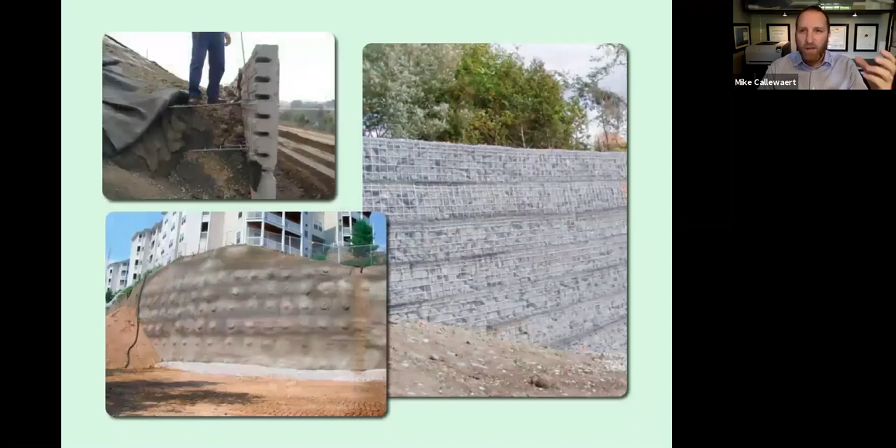So I want to talk a little bit right up front about mechanically stabilized earth, or MSE wall. You'll hear that phrase MSE wall, and it covers a lot of ground, really. It can be anything from straw and adobe blocks all the way up to engineered systems like you'll see today. So pretty typically when folks think of MSE, they'll think of things like a wire mesh or shotcrete or concrete facing, even things like wood crib walls or segmental block walls, that sort of thing. Even poured in place can be classified as MSE.

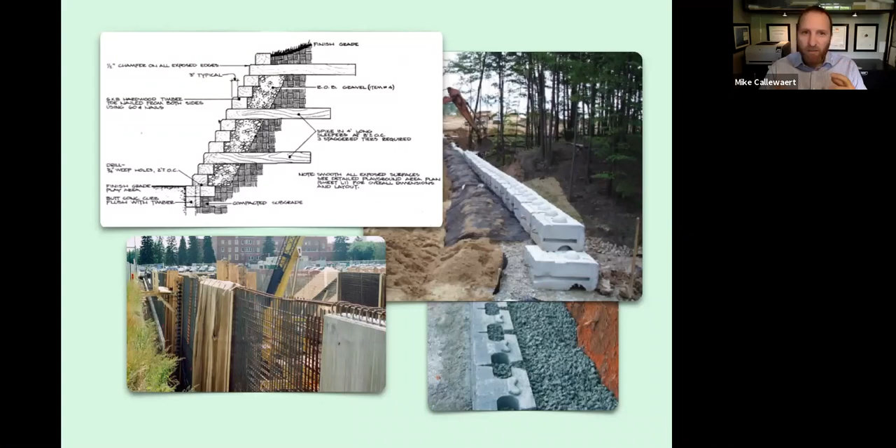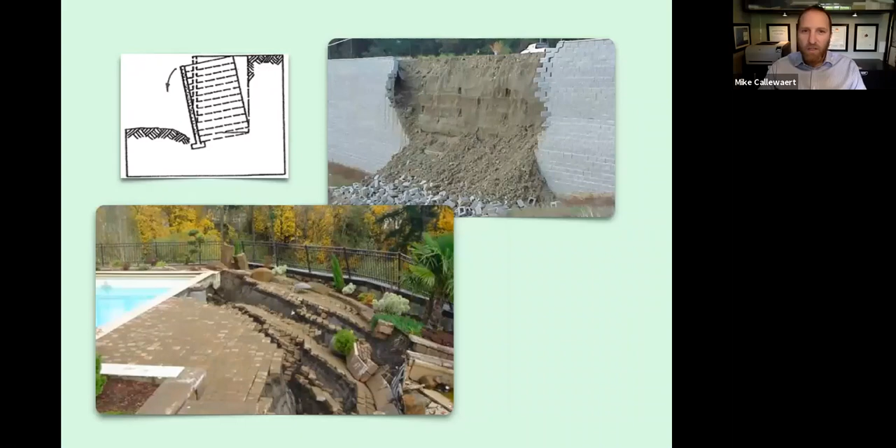With these types of walls, some of the challenges that we see are where you might have differential settlement, overturning, you might see hydrostatic pressure or soil movement from behind the face. It can cause some pretty catastrophic failures. It can also just cause some disruptions where you get a little bit of settlement and all of a sudden the system is no longer stable.

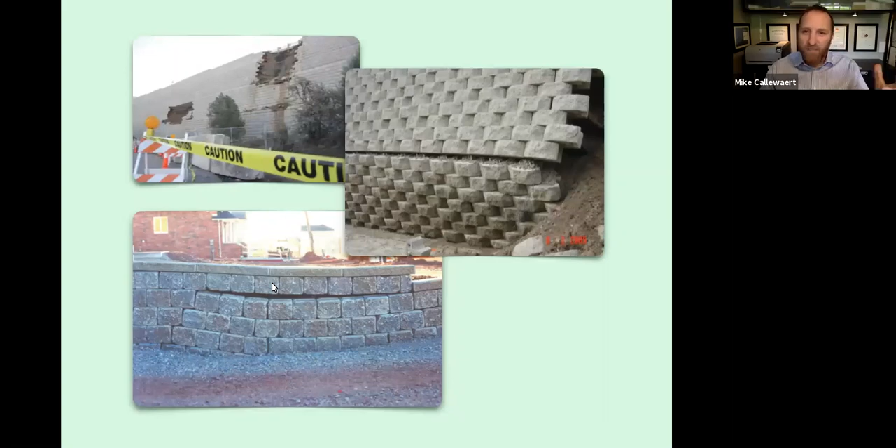Now you might be looking at this thinking, what's the big deal? It's a sandbag and a clip. It's actually closer to concrete than it is to a sandbag. So I want to talk a little bit about how it's similar to concrete, and then we'll talk about how we're unique to all other systems in the market.

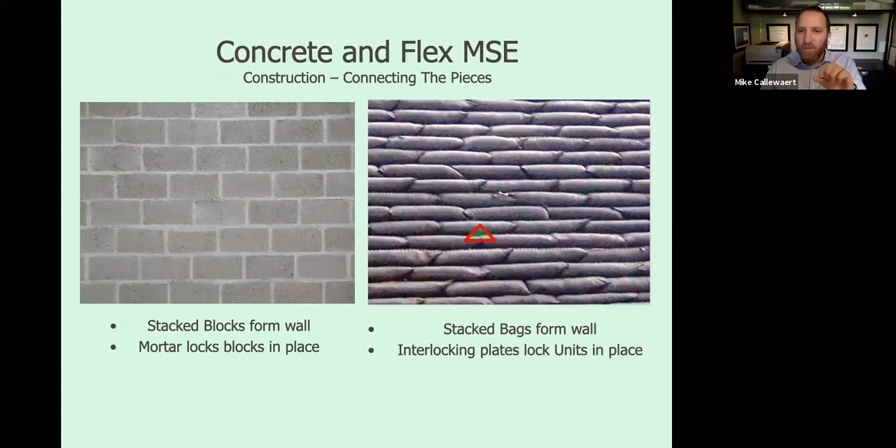So like concrete, you stack in an offsetting pattern, so you create a running bond up your wall. The interlocking plate bridges the joint between two bags, so that when your subsequent row comes in, it centers over the plate, locks it into place, creating a mechanical connection. So you have hundreds or thousands of these throughout a wall. So there's no single point of failure, but they connect it together much in the same way that mortar or pinning might with other systems.

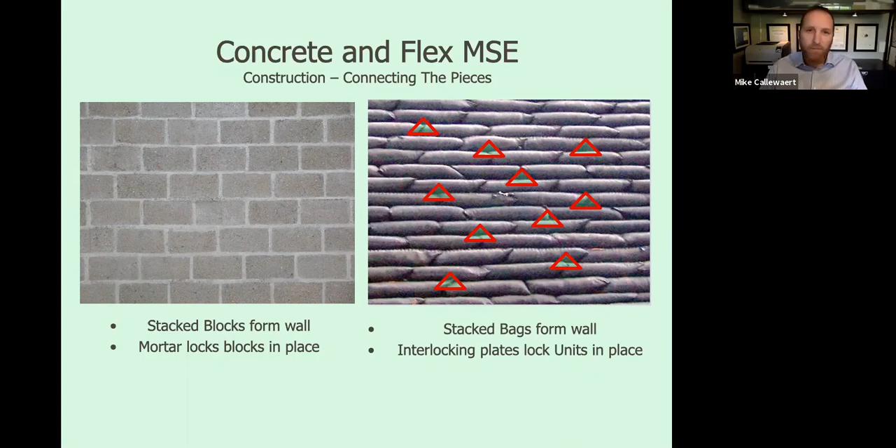If you want to make a Flex MSE wall green, you vegetate it. And so there's a number of ways to vegetate the system: grasses, flowers, trees. We get into that as we go. If you want to make a concrete wall green, you paint it. Then you come back in 2 weeks and you paint it again.

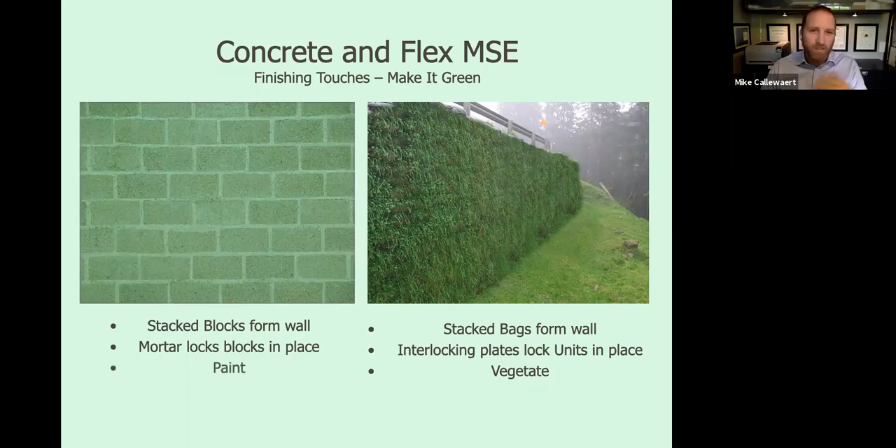For your folks that are designing and building in public space, maybe graffiti is an issue. Maybe that's a line item in your budget that you'd like to get rid of, so you can get that piece of equipment or that new hire. With Flex MSE, if they want to graffiti our system, we'll just hedge clip it off and call it a day. So that's really where the similarities end between the two.

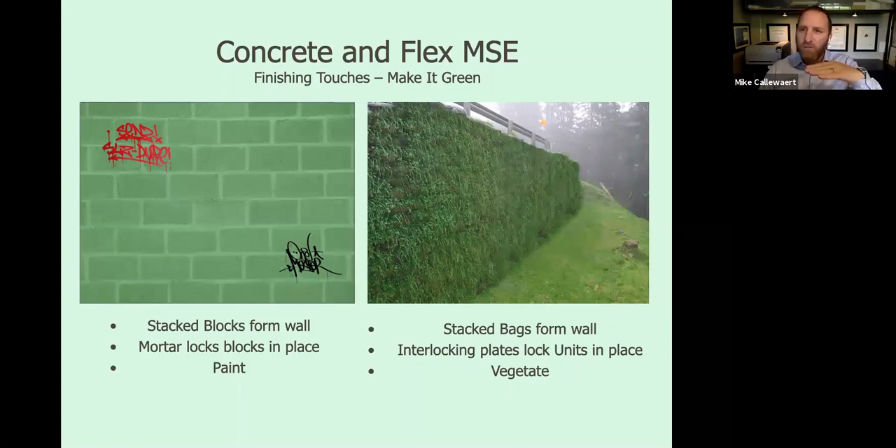So let's talk about how Flex MSE is unique to all other systems in the market. So it can be installed anywhere from horizontal, so for channel claddings and outfalls, that sort of thing, all the way up to pure vertical, where it's attached to an existing structure like a living wall. We typically see 1-to-1, so 45 degrees, to 1-to-10, 85 degrees.

The nice thing is it's the same two components regardless of your batter. So you're never getting that panic call from the job site saying, oh, the grading's changed, now we need a plate B with a bag C. It's always the same two components, so very versatile in installation.

It's able to withstand almost unlimited differential settlement. So over a 10-meter stretch, the system can settle up to 2 meters without failing. So if you have 2 meters of site settlement, you have other issues, but a failed wall isn't going to be one of them. The way we were able to determine this is through FLAC analysis.

So we were being considered for a diking upgrade in a very seismic heavy area. And so they, FLAC is earthquake analysis. So they modeled 10-meter sections of Flex MSE, a block, a basket, of earthen berm. And then they ran simulations from a 4.0 all the way up to a 9.0 with liquefaction. And the only system that survived that entire range was Flex MSE. The maximum settlement was 2 meters.

So this is great for seismic zones, but it's also really great for areas where you might have less than ideal soil. So marshes, bogs, soft areas. If you saw a little bit of settlement, say you saw 150 mil or so, and you were satisfied that it had stabilized, it's very easy to add bags to the top of wall, revegetate it, and move on. With a hard armor system, if you saw that much settlement, you're likely taking the whole thing apart and resetting it and starting over. So really great for those challenging soil sites.

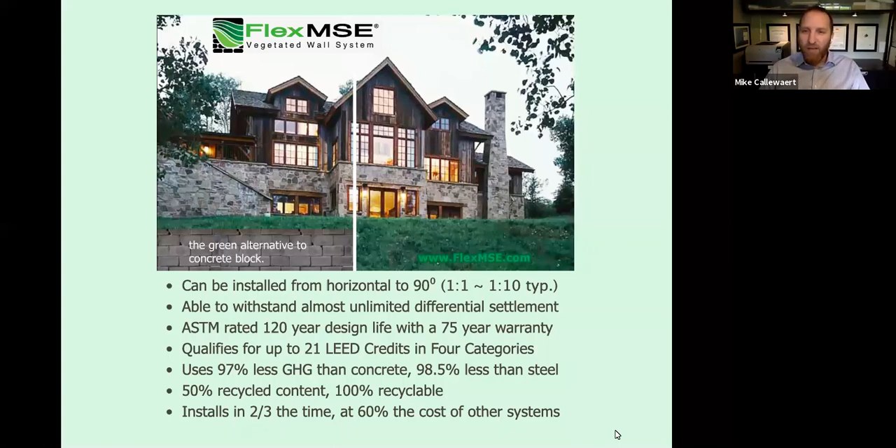The system can really help with a lot of your projects to keep you on budget, on time, and hit those environmental targets. So let's talk a little bit about where you can use Flex MSE. So for infrastructure, as we mentioned, we have our TRA Grade A. We've had that for a number of years.

At the beginning of this project, there was an environmental monitor who took clippings of the native grasses and flowers, and that was simply hydroseeded on the face at the end of the build, and you're back to nature. So very easy to naturalize these sites after the build and get it back looking good.

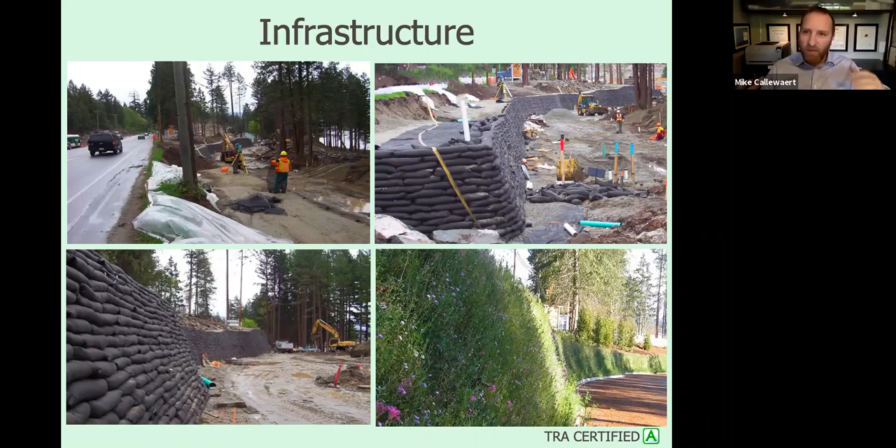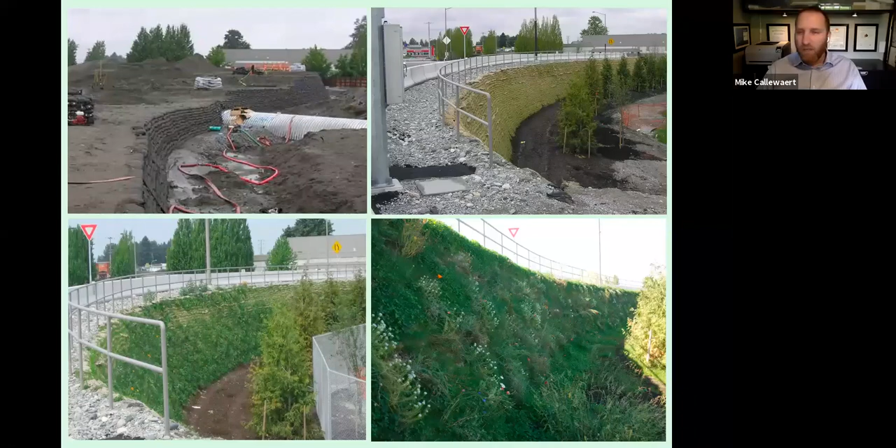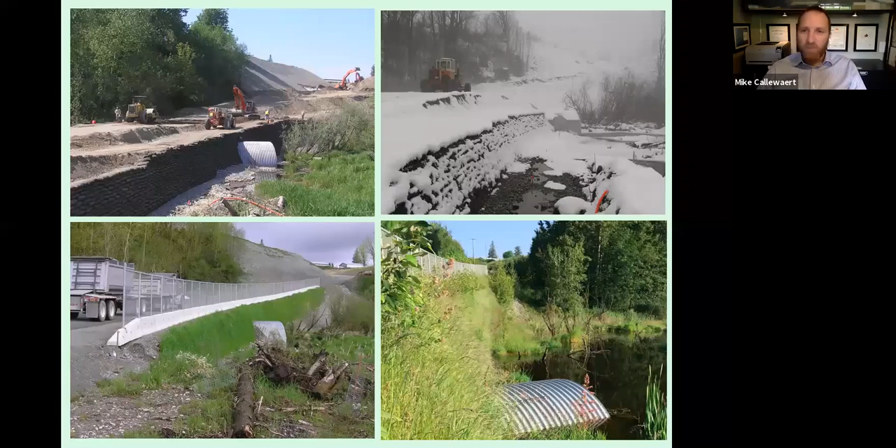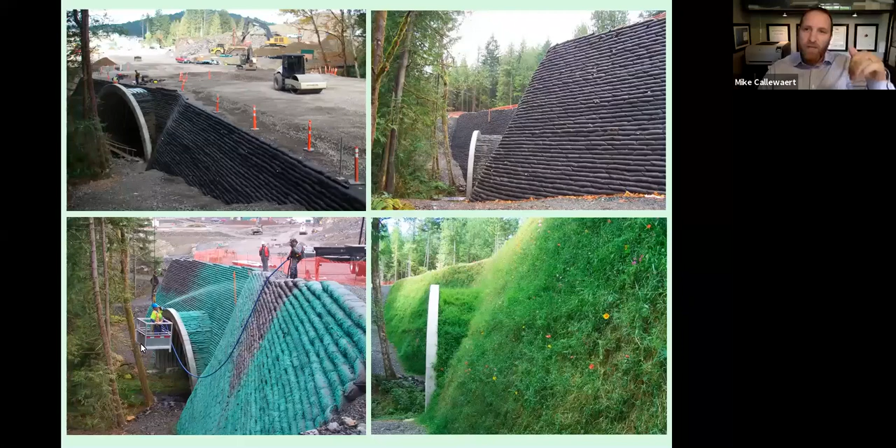Great result there. This last example in infrastructure, this is a 10.5 meter tall 4-lane roadway built on the system. This is a very challenging site. They've got old growth forest here. They've got a fish-bearing stream, and they have about 1.5 meters of laydown on either side of this roadway. So tight, in fact, the fellow that's hydroseeding here is hanging off a crane because they couldn't get equipment down that could lift them up high enough.

This was originally specified to be a concrete block face. So in order to go up 10 meters, they would have had to go down 2 meters to lock in the toe. With Flex MSE, the maximum embedment we see is 300 millimeters. So you trench down 300 millimeters, 150 millimeters of clear crush, and then your first row of Flex MSE and you're back at grade. So very limited site disturbance.

We're not hauling a lot of stuff away. We're not bringing foreign materials in. And then the finished product looks like it's been there all along. So a great result. This was just a natural wildflower mix and did a great job.

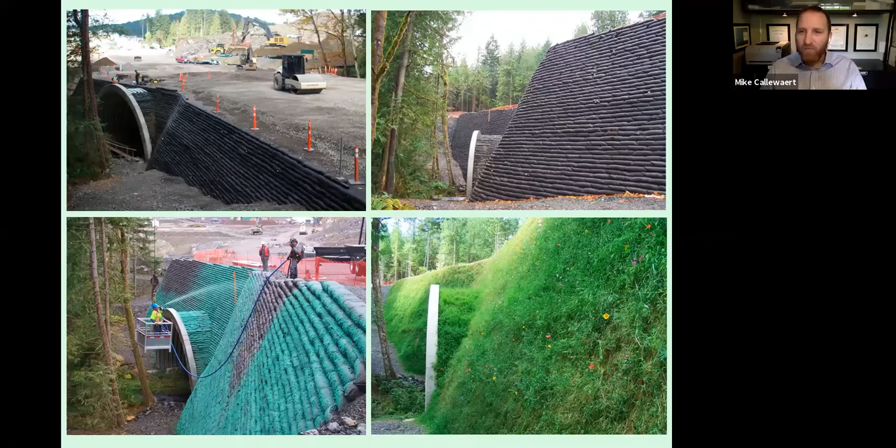So another area we do a ton of work in is anywhere land meets water. So fisheries and waterways folks love Flex MSE for three primary reasons. One is it doesn't create a heat island, so it's not heating that water up. Second is it doesn't leach anything, so not from the bags themselves, but it also prevents silt and sediment from transitioning from the backfill material.

And the number one pollutant for waterways in the world today are silt and sediment. So what happens is they get into the water, settle to the bottom, create what's called an anoxic environment, so choke the oxygen from the plants and the fish and that sort of thing, and then can effectively kill a waterway. So we prevent that. And then the third thing is we're able to restore the riparian zone very quickly.

This is a project from about 10 years ago now. And you'll see there's river cobble and riprap along the toe of this wall. We've actually moved away from that method now with Flex MSE. Instead of bringing in stone and other things that could cause heat island or could be easily displaced by water, we've actually moved to wrapping the lower courses in Geogrid.

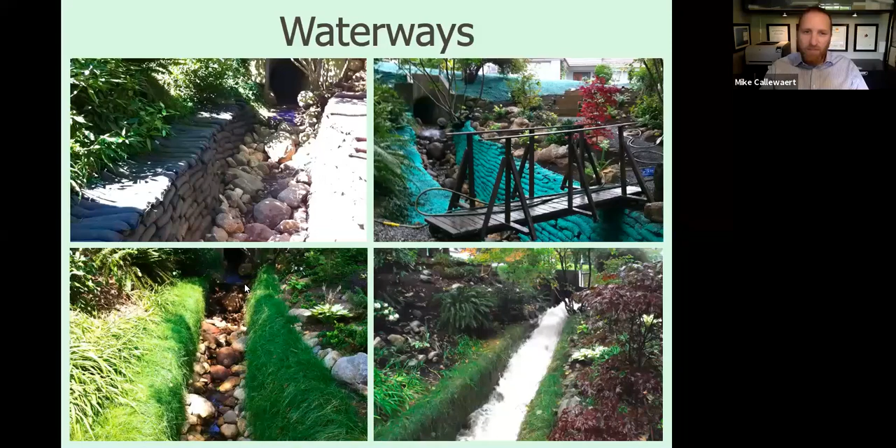So the Geogrid goes in, two lifts of Flex MSE, and then the grid folds back into the backfill zone, completely capturing those rows. And if the scour wants to try to remove those lower courses, it has to take the entire structure with it. So it's very strong. The vegetation still grows through the apertures in the grid, so it completely disappears, but it's incredibly strong.

In this example here, this is pretty typical flow for this little creek, but under a storm event, they might get within a couple bags of the top of the wall. If the normal high water mark was up near the top of this wall, we would wrap 2, skip 2, wrap 2 until we reach that high water mark, creating an incredibly strong reinforcement without having to add rock at the toe.

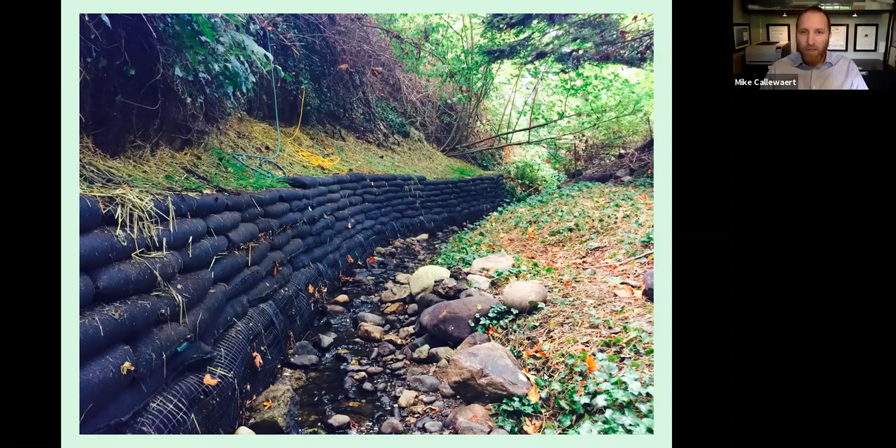This example here, another little creek example. These folks here had mudslides that would take out this little creek. They'd have to dredge it every year. They rebuilt the banks with Flex MSE. They've even got a nice little head wall here with a walking path above it. And this bottom photo is 2 years post-vegetation. So live, planted with...

Sorry to interrupt. Yes, we have a question regarding this point before you move on. The question is, how does the system handle water seepage from the bank drainage? Yeah, so a great question. And we covered this a little bit as it comes up, but the system is a free draining system. So it doesn't require supplemental drainage. So we don't have a chimney drain behind the face, or we don't require drain rock behind the face.

We actually want the water seeping through, and that's kind of where we part ways with traditional wall systems, is that if you're designing with a hard armor system, you're trying to get the water as far away from that face as you can. And we actually encourage it. So it'll feed the root system, and it acts as great stormwater management even, because it'll slow down the flows enough so the existing drainage can keep up with it. So great question. Certainly a big advantage for Flex MSE is that ability to be free draining and accept that groundwater.

Thank you for the clear answer. On the same point, since we're talking about the drainage and how it works with this system, how does the bag material stand up to chemical de-icing and pollutants that run off from roadways? Yeah, so that's another good question. The bag material is stable at pH levels from 2 to 13.

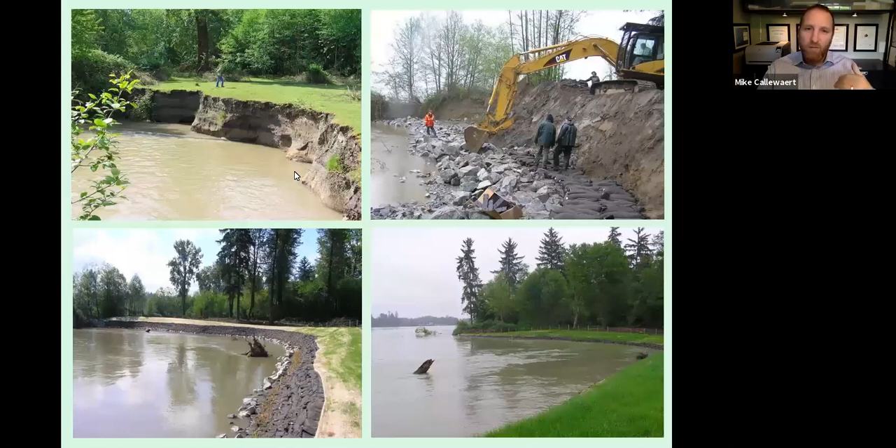Couple other spots in waterways here. This is a major river system where they had heavy erosion happening. This is First Nations land, so they were losing some of the midden, and it's a heritage site, so they were really quite concerned. They weren't even allowed to drill pilot holes for earth anchoring here because it's a heritage site. So we were able to build a launch apron here, and then a single face of Flex MSE at the shoreline. And the last photo here kind of shows the second 100-year flood we've had in the last 10 years in this spot.

Lots of debris, flows that can get beyond 6 and 7 meters per second. This was meant to be a temporary fix, but this is 2004, and this is what it looks like currently. So those major systems, waterways, we can definitely use those.

Another area we do a ton of work in is, of course, erosion control, that sort of thing. I want to show a couple examples of this. This is a municipal project where they had a shallow slope failure here from a water event. 4 guys from the municipality were able to show up. They filled the bags using the slough material that was on site because it's not structural. All they were trying to do is protect this compacted road base from further erosion. So they just stacked it up in a gravity-style wall, hydroseeded it the next day, and then they're back to nature. So very easy. I think they were in and out of the project in 4 hours without having to wait for anything to set up. No major machinery. It's quite a good project.

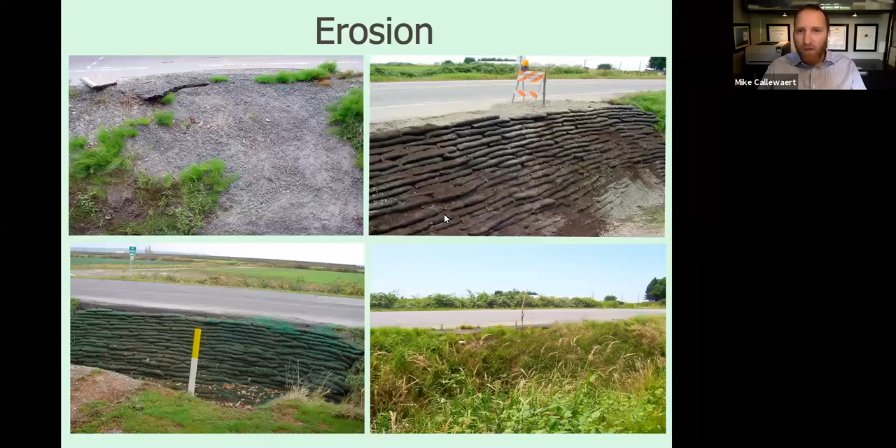And then this example here, this is in New Zealand where they had not a lot of room to excavate to move this bank away from the roadway here, and they were getting a lot of erosion, and it would close off this little roadway. You can kind of see the fresh paving here. It had actually taken out this section. So they reestablished the bank here and then vegetated it, and now have stabilized this slope. So a lot of these really tough areas, tough to get into, tough to get reinforcement, that sort of thing. Flex MSE can fit into those areas and do quite a good job.

So another area, of course, that we do a lot of work in is our slopes and walls. So this is a shot of our tallest slope to date at right around 21 meters. This guy in the center here is actually in the middle of the shot on the left. This is a really challenging site, roadway above, water below. Everything was staged off-site and then barged into the toe of the wall. And they constructed up 2 meters in 2 meters until they reached the top of the wall and drove off. To drive a single pile here was over $1 million, and we were able to complete the entire project for under $1 million. So pretty incredible. And then they hydroseeded it, and they're good to go.

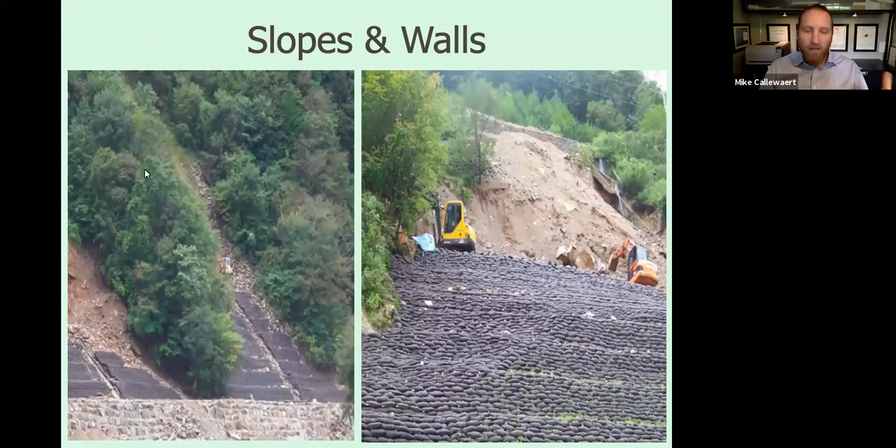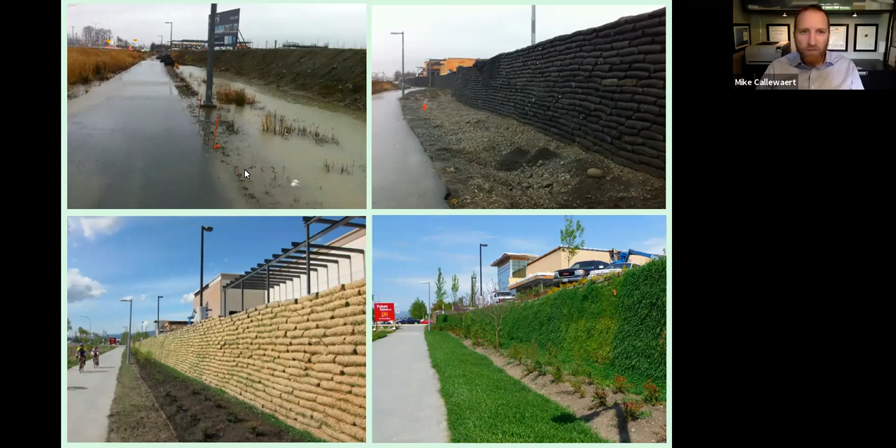And the wall looks amazing, and is providing a very serious site retaining function. This example here is in the city of Fredericton. So they had this area that would flood every year and cause major issues. So they grubbed this all out of there and basically tiered this up, and were very creative in their planting.

This is a 10 out of 10. These guys did a great job on this site. There's a heritage marker up top here, so they were concerned that the erosion was going to take the bank down at some point and topple the marker and all that sort of thing.

So this area still floods. You know, they haven't quite figured that piece out yet, but it floods. But when the floodwaters recede, the wall is in place and still looking beautiful. So great job there. Things like trail systems, that sort of thing.

This is supporting a roadway, but it's also bordering on a major trail system. You can see this is around 8 kilometers that cuts through a forest that they built with the system. Pretty incredible. It looks great, it looks natural, and this was a cut fill type of approach.

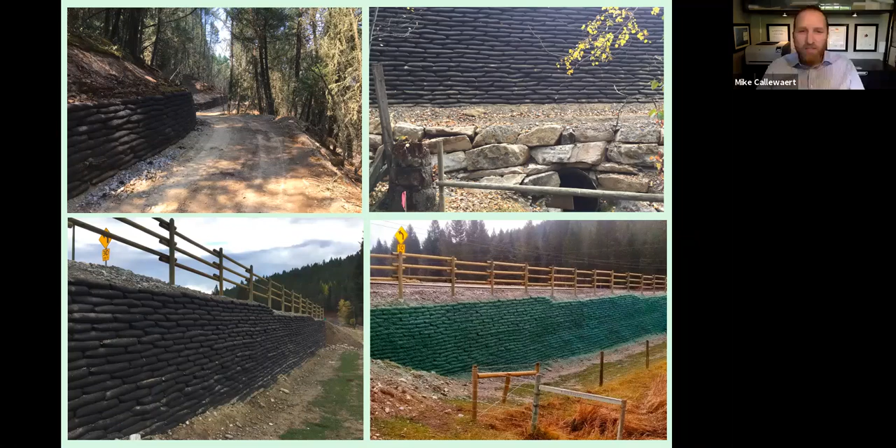And then the last wall I want to show you guys is our tallest pure MSE wall to date, at right around 13 meters tall. This is in Kirkland, Washington. Really tough to get a single shot of this from the ground, so we have a little bit of drone footage. This is the building site for a 3-story, 147 resident memory care home in Kirkland. Very challenging site.

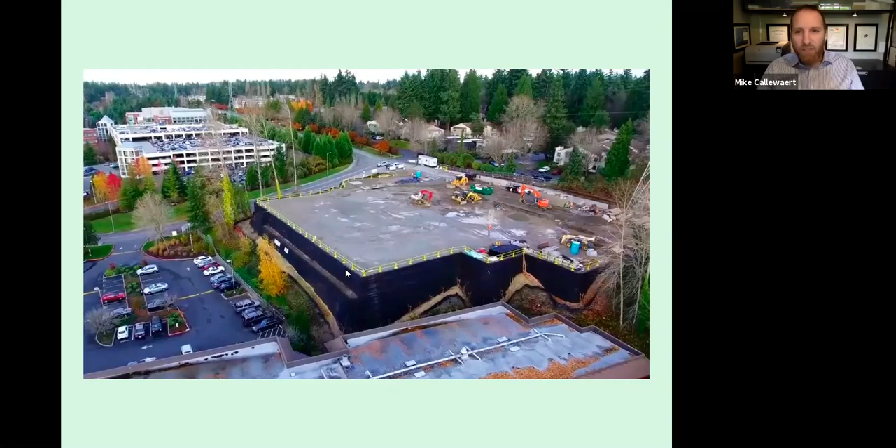So one of the key things with Flex MSE is we follow the same conventions as block and basket. So if you have a plan sitting on your desk today that has a concrete face or a wire basket face, you can simply replace the face with Flex MSE and not have to redo your internal stability, because we follow the same conventions of 60 to 80% of your overall height embedded every 600 mils of lift.

The nice thing about Flex MSE being modular, though, is instead of every 4th row of bags, the engineer in this situation was able to put in grid every 2nd row or every 3rd row and increase the number of intervals going back without having to increase the length, and was able to get the strength profile he needed.

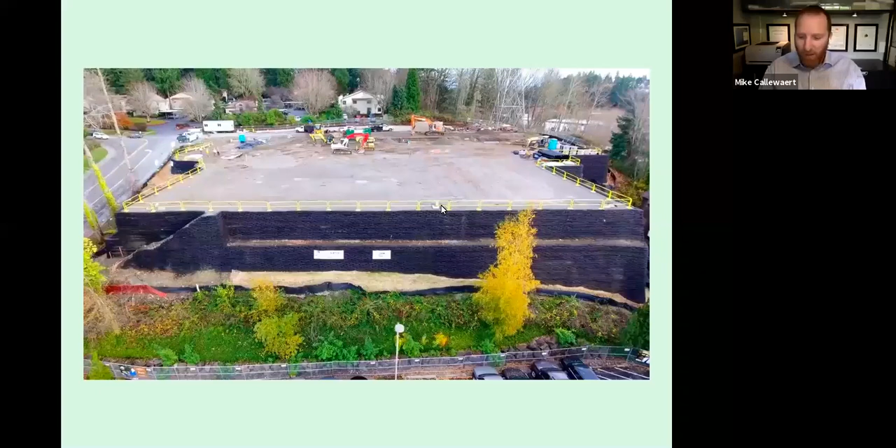The building is fully constructed now. It's within 1.5 meters of the front edge of this wall, and I could show you guys some photos of it coming up. But there were 2 major things that happened during the construction of this building after the wall was built. They had a 3.4 magnitude earthquake, and they set 3 rainfall records.

This wall face was continually surveyed throughout the build, and they come in weekly and hit the sensors and that sort of thing, and there was 0 movement recorded throughout the build. So pretty incredible static loading there.

There's another question, Mike, if you would like to answer before we go forward. And Joel is also welcome if you want to jump in. Can Flex MSE be used in a wall that abuts a concrete wall? And if so, what type of connection is best between the 2 walls? Sorry, you cut out there on the first part of the question again? So it says, can Flex MSE be used in a wall that abuts a concrete wall? If so, what would the connection between the 2 wall types look like?

Great, great question. We have a lot of hybrid walls, not just with concrete, but with stacked rock and that sort of thing, where you may start with one material and then finish off with another. Typically, a Flex MSE will just sit butt up against those materials, or sit on top of those materials if you wanted to use rock or something as your base, your foundation. So it'll just sit and it'll fit into the shape of the rock, that sort of thing.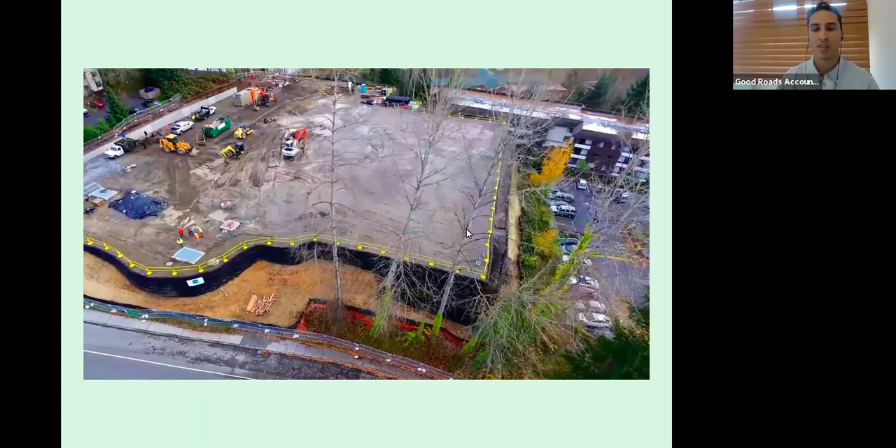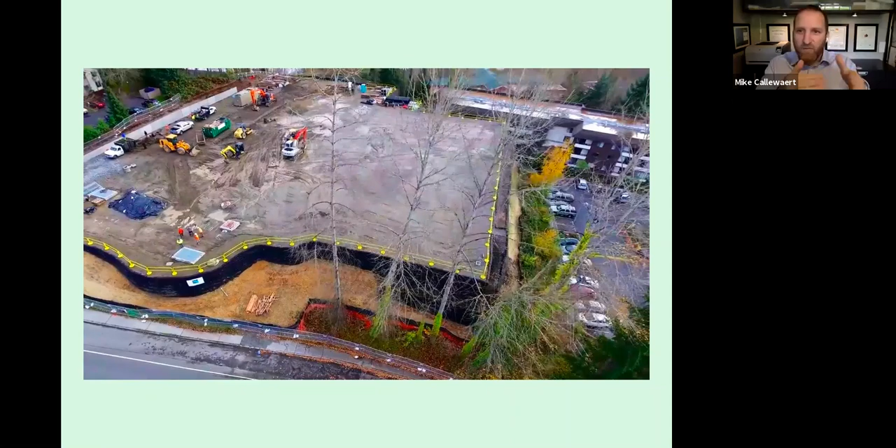So moving on from walls, I want to move into landscaping, which seems like a pretty obvious one for us, but you know, there's a bunch of advantages to this. You can snap a straight line and create right angle corners, that sort of thing with Flex MSE, but you can also create an organic line or follow a line that's there, go over things like rocks and stumps and that sort of thing without impacting the integrity of the system.

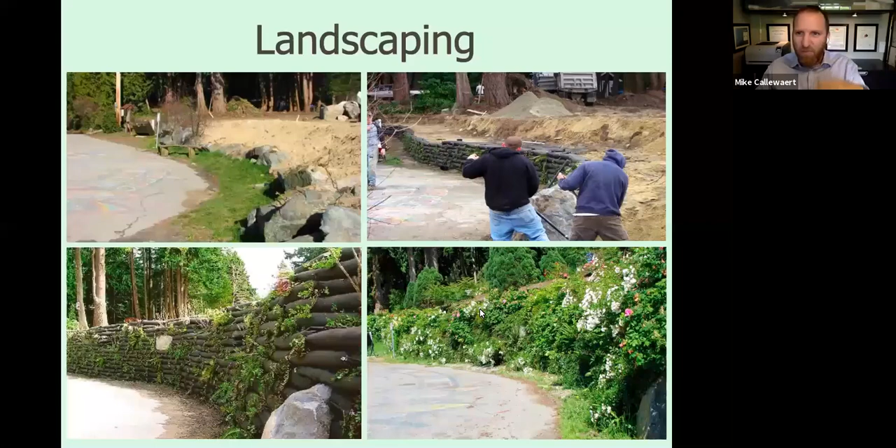So in this case here, there used to be a concrete wall here, lots of graffiti, people breaking bottles against it. They'd hop over and party in this guy's yard. So when it came time to replace it, they had Department of Fisheries and Oceans, 2 First Nations groups, a regional district, a parks division, a community group, a lot of decision makers. And the only mandate was unanimous approval. So easy, right? This was the only system that kind of met everyone's needs. And at the end of the day, in this little park here, you've got this beautiful naturalized wall that looks like it's been there all along.

They told us we couldn't put green walls in the desert. Well, this is a desert application at a winery where there's a vineyard above this wall that continued down to a road below. They made a 5-meter cut here to put in a parking lot, but there's a high plastic clay backfill. It's south-facing, you know, all those great things you want with a green wall in the desert. I have a lot of photos of this wall fully grown in, looking amazing. But I like this one because you can still see that drip line irrigation kind of poking through the grass.

So I say build like concrete, finish like landscaping. So if your region requires it, your vegetation selection requires it, or your orientation of your wall requires it, then irrigate the wall. And you can do it with drip line, you can do it with spray heads, you can do it with light frequent manual watering until the plants are established, and then it can take on a life of its own. So like I said, this is kind of where we part ways with traditional systems where we want the water there.

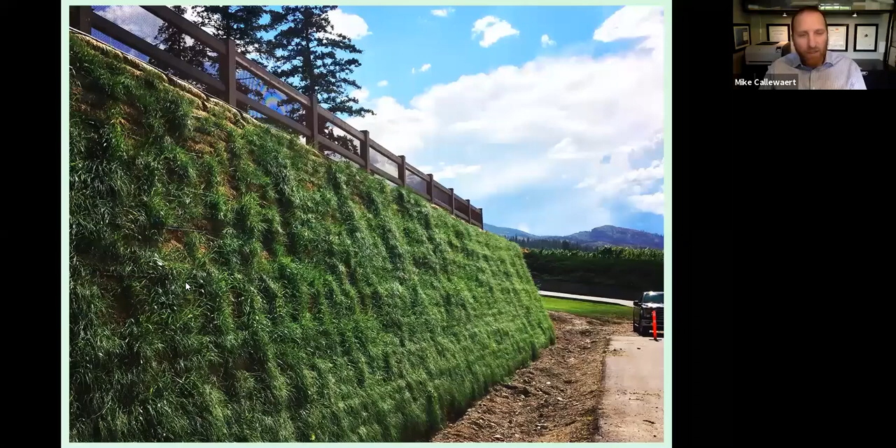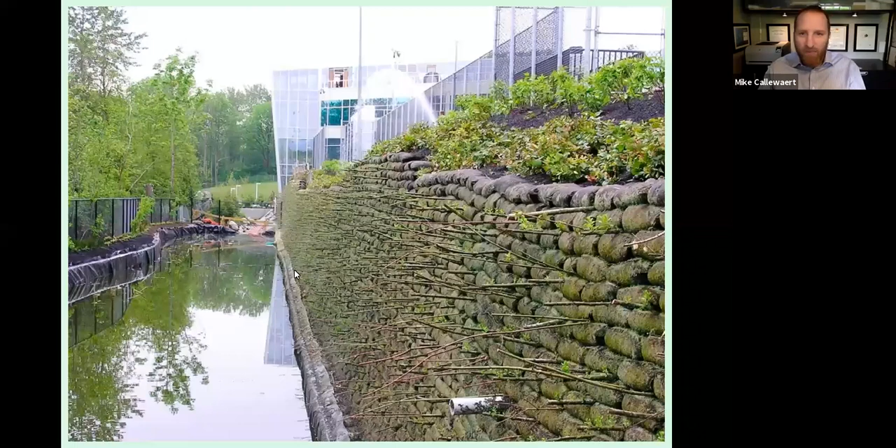This is the first gold LEED certified building in Canada. This is EA Games, the video game guys. This is their headquarters. This wall here is 200 meters long, and the batter on this wall changes 6 times over the course of the wall. So even though the toe is snapped to a line, they've got a soccer pitch and a tennis court and a basketball court and a park above this. So the top of the wall can accommodate those changes without impacting the integrity. This wall was live staked with willows.

So the process here is you have somebody with a little piece of rebar and a mallet creating a void between the bags, and then somebody following behind filling those voids with willow cuttings, and then you splash a little water on it, and 45 days later, this is what you've got. This was in 2006, so these willows are now 20 feet tall.

The nice thing about a willow is that it has a rhizomatous root pattern, much like grasses. So it's actually adding strength to the face because it's further connecting the face to the backfill zone and providing that further connection. So willow, alder, dogwood, all acceptable forms of vegetation for Flex MSE. So you're not stuck with just grasses or low-growing varieties.

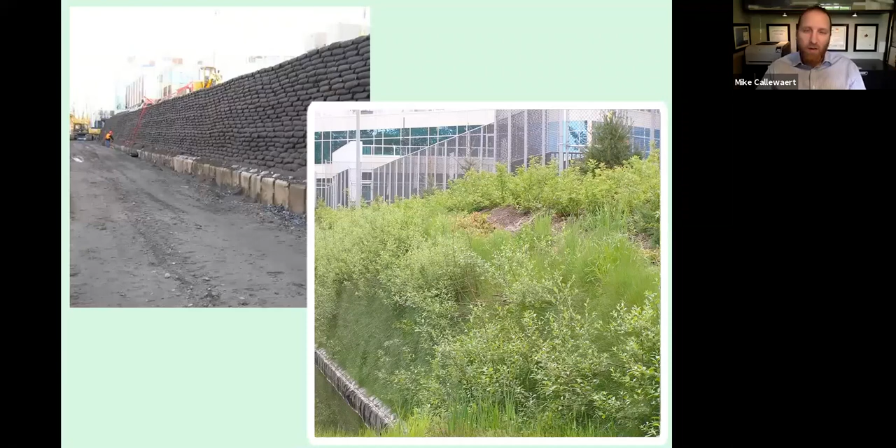Next, I want to talk a little bit about public spaces and community projects. So this is a kilometer-long sound barrier wall in Red Deer that we did. This used to be farmland over here, and they decided to punch in the ring road around the city here. So the residents at this little subdivision weren't too happy about that. So what they did is they put in this 2.5 meter tall, kilometer-long sound barrier

to separate the two. Now, if you know anything about sound barriers, what you're trying to do with sound barriers is get to 1. So 1 is anechoic, no sound. The concrete fences and that sort of thing you see along roads, they're pretty typically 0.6, which means that 40% of the sound is being reflected back. So that's pretty standard.

When we did our ISO testing, Flex MSE, a single layer without vegetation is a 0.8, so pretty good. That's the equivalent of 4 sheets of drywall stuck together. A single row of Flex MSE with vegetation is a 1, so it's as good as it gets. So you can imagine in this case, they've got a row of Flex MSE, they've got compacted earth, they've got another row of Flex MSE, vegetated, nobody's hearing anything.

The nice thing about the system, these guys had the room to build a wider berm. But the nice thing is that you can connect both sides of Flex MSE with Geogrid. So instead of a typical pyramid style berm, you can actually tighten up that base because you're connecting the grid to both sides. And so you don't have a big footprint, but you can still get the height that you're after. So great example of using the system there.

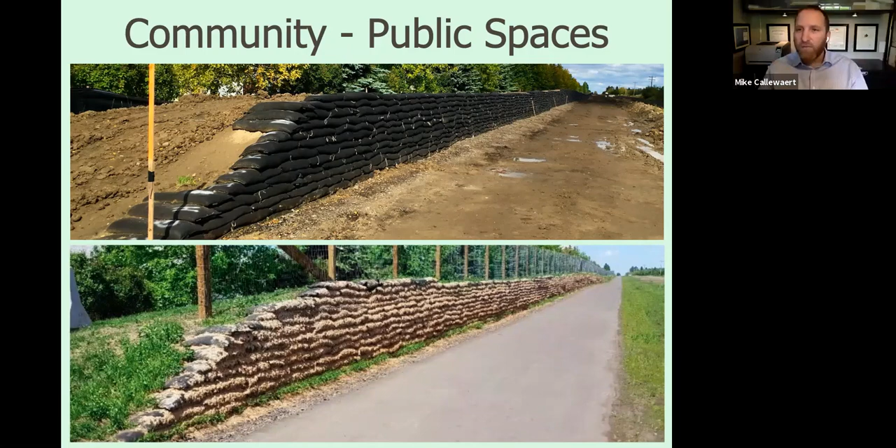We do a ton of trail work. So whether you're doing a cut fill trail, punching a new trail through an area, or you're doing a repair like these folks here, where they had a shallow slope failure that took out part of the trail, we're able to reestablish the trail, implement their fencing, and then vegetate it with a native variety so that it completely disappears. So it's pretty incredible.

The system is really easy to transport into these sites. So in this case, these folks were staging it in a parking lot down the trail, and then they were using his track machine to get it in. But you could fill it right at site. You bring in your materials. We have folks that'll just throw this on the back of an ATV and take it down a trail to fix a problem. Lots of options as far as that goes.

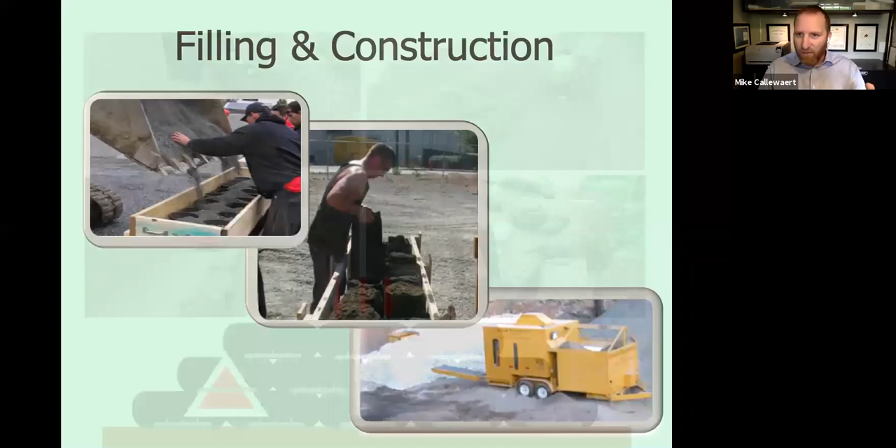Yes, actually our attendees are asking questions at the exact right time. Since you're talking about the filling of the bags, there's a question asking about what type of fill material goes into the bag. Okay, yeah, great question. It's a 66% sand, 34% compost with less than 8% fines overall. So good clean sand, a nice compost, and blended by volumes. It can be mixed on site, it can be pre-screened, that sort of thing. The nice thing for municipalities in particular is that you guys likely have these two components already on site for other purposes. You probably have a good sand, you probably have a good compost.

So for instance, the city of Fredericton, when they did their job, they used their summer students and their entry-level folks to fill bags over the course of a couple months in preparation for that project. And they probably saved themselves in the neighborhood of around $100,000 doing that because it was very gradual and inexpensive for them because they already had those materials at volume. So for municipalities, if you have the folks to do it, then I would suggest filling them yourselves, like 66, 34, and you're good to go. Joel, you have something to add on this question?

Yeah, I was just going to say, should you not have those fill materials, again, these bags are available to be pre-filled at one of our designated fill lots in the region, and then we can ship them to site already pre-filled with the correct mixture that you don't have to worry about. So that's something to keep in mind as well. So if that is a concern, there is that solution as well.

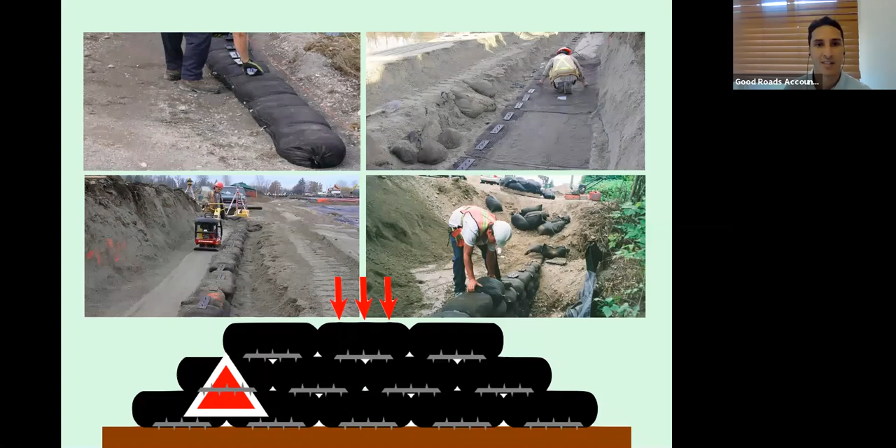I appreciate it. All right. Was there another one? Yeah. No, just since we stopped anyways, I thought I'd let you know how you're doing time-wise. We have a little bit more than 15 minutes of time. Perfect. All right. Great. Yeah.

So talking a little bit about construction, we're the only vegetated system in the world that certifies its installers. Our certification is free. It's online. And we would encourage you and your team to take that certification for a number of reasons. Even if you're not going to be installing Flex MSE, if you're just going to be overseeing it, that knowledge is really going to help with quality assurance, that sort of thing.

I always joke that if you've built a wall before, you're overqualified for the system. We see a lot of professional wall builders really screw this up because they try to overthink it. Having certified installers accomplishes two major things for us. One is you have a beautifully built wall. The second is you'll have these projects bid in reality. If somebody doesn't know the system, they might double it and add 10 because of the unknown. If they've gone through certification, they understand what goes into it, they realize how easy it is, and they can go from there.

Just quickly, you just need a relatively flat base. First row of plates goes down. First row of bags center over those plates, and then you bridge the joint between each bag with another plate, offset by half a bag, center over the plate, rinse and repeat. It's really that simple and very easy to overthink. So I would encourage you guys to reach out and get that certification. Like I say, it's free, it's online, and you're good to go.

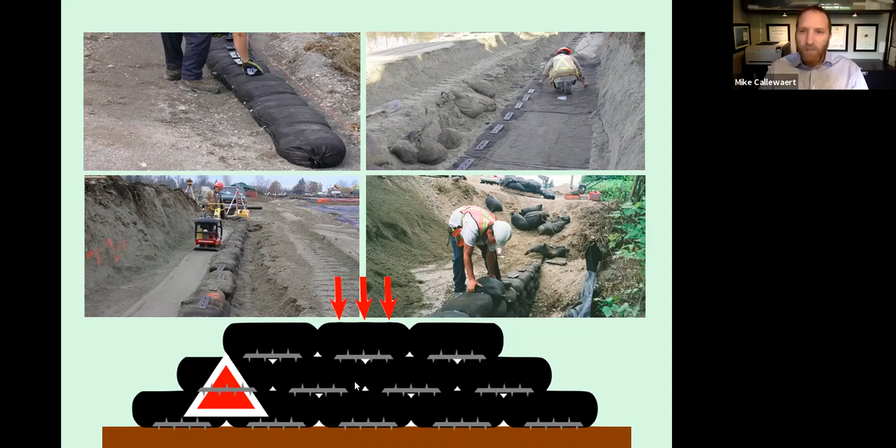For vegetation, the most popular method is still hydroseed. If you're hydroseeding a Flex MSE wall, rather than use the straw or paper mulch you would typically use on your horizontal surfaces, we recommend using a flexible growth medium or bonded fiber matrix. There's lots of great products out there. FlexTerra is one that's used quite a bit on our system. The nice thing about FlexTerra is it goes on in 2 applications, and they guarantee adhesion for up to 18 months. So it gives the vegetation time to establish and germinate.

You can also make up to 3 inverted T-cuts in the face of each bag to accommodate larger plugs, or 20 dibber punctures to take things like fine plugs. We'll allow 20% of the face to be cut for vegetation. So you're not just limited to grasses. You can be really creative with your vegetation. If you're installing near water or you don't want to cut the bags open, you can also use brush layering, where you're setting your root wad in behind the wall and bringing the plant out between the bags. Then you can have mature vegetation day one.

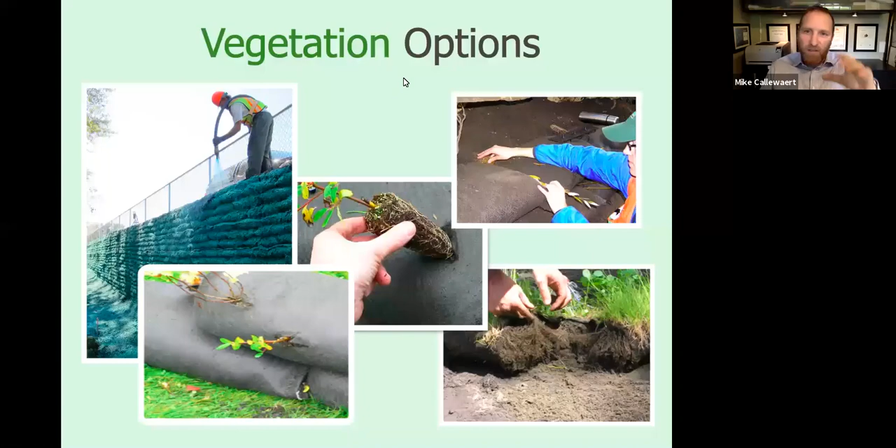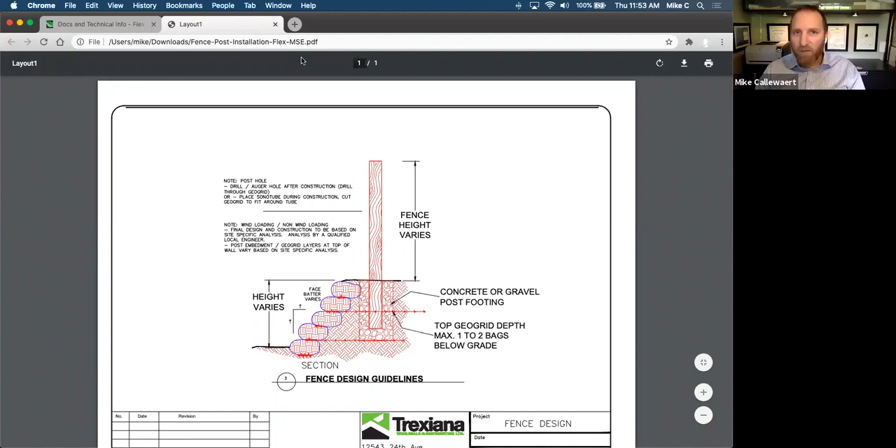So if you're trying to figure out, okay, how do I put a fence post in Flex MSE? Very easy. There's a design here for that you can incorporate right into your plan that talks about our approach there. So from a CAD perspective, we've got 35 different standard CADs, and we're adding to it as we find different applications and that sort of thing.

Technical information here, you'll find our bag filling material spec, as well as the filling jig plans. Installation guides, seed spec examples, training videos, as well as a maintenance brief that you can leave with your maintenance crew at the end of the build to talk about what you can and can't do with Flex MSE for maintenance.

Other documents are things like our warranty and the longevity. When I talk about 120-year design life, all the testing that's gone into that is in there, as well as photo sets, small case studies, that sort of thing. So there's lots of really good information in our technical library on the back end.